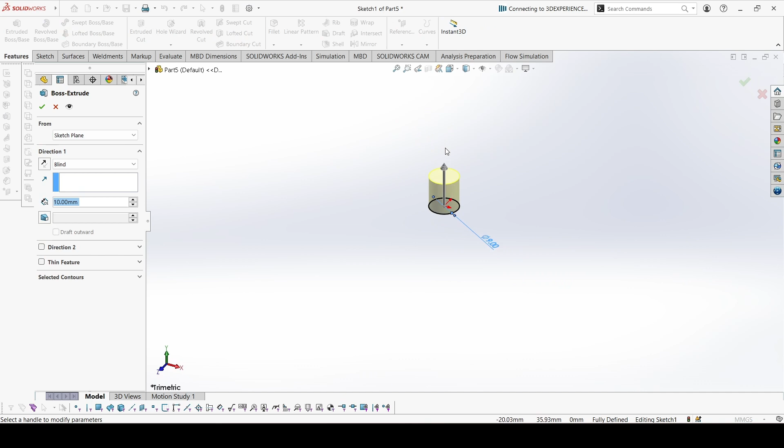Let's start. You can sketch on the top plane. Make a circle. The diameter is 9. Extrude it. Height of extrusion is 120.

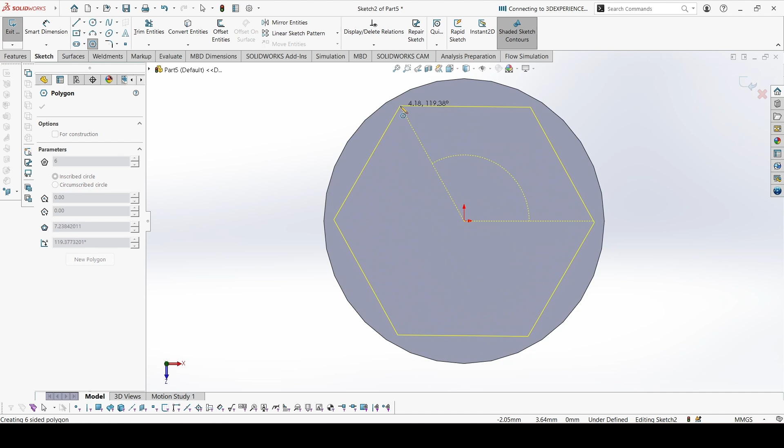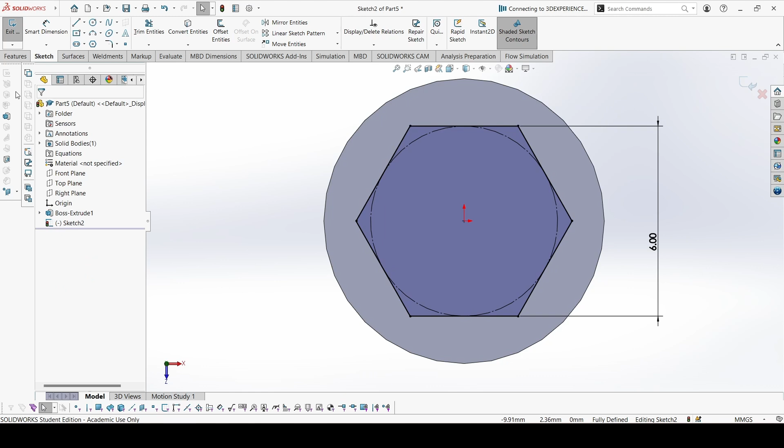Now sketch on this surface. Create a hexagon, using a polygon with 6 sides. The dimension for this distance is 6, and you can make one of these lines horizontal to constrain it. Now we can extrude again. This is 20.

It's done. We can make a chamfer of 1 mm on this edge.

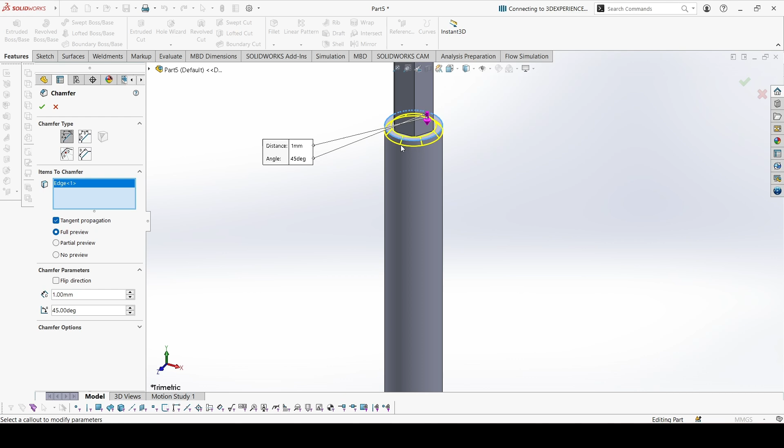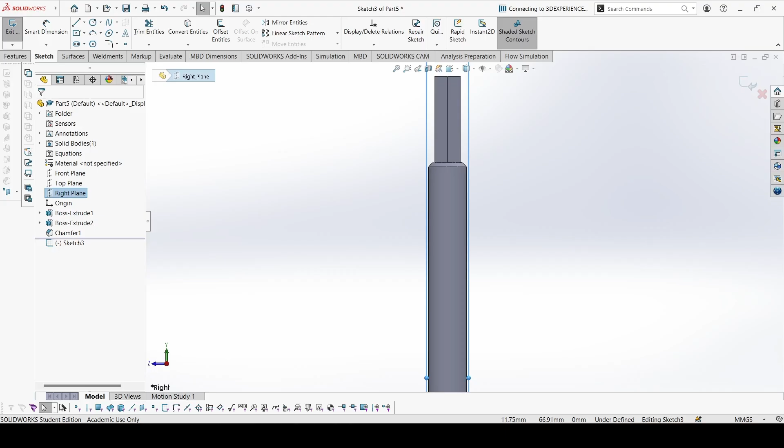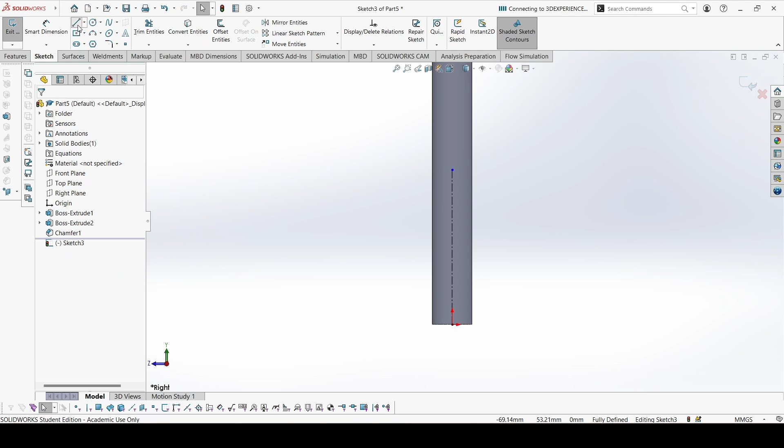Now we need to sketch here to cut this part. First of all, let's create a center line, since the feature is symmetric. Now from here you can make this line. This will be like this.

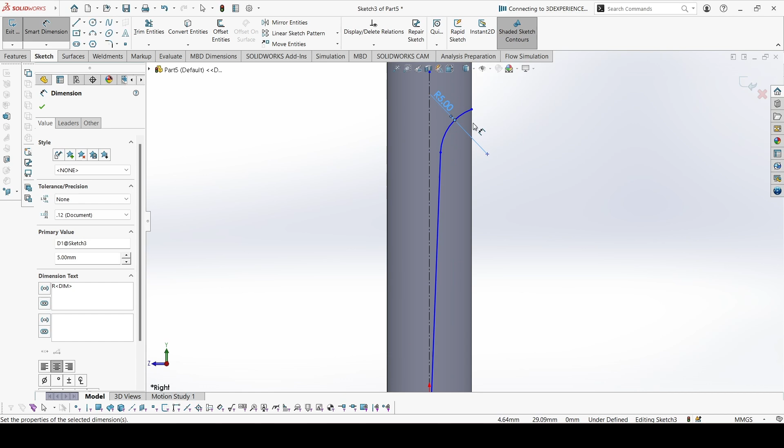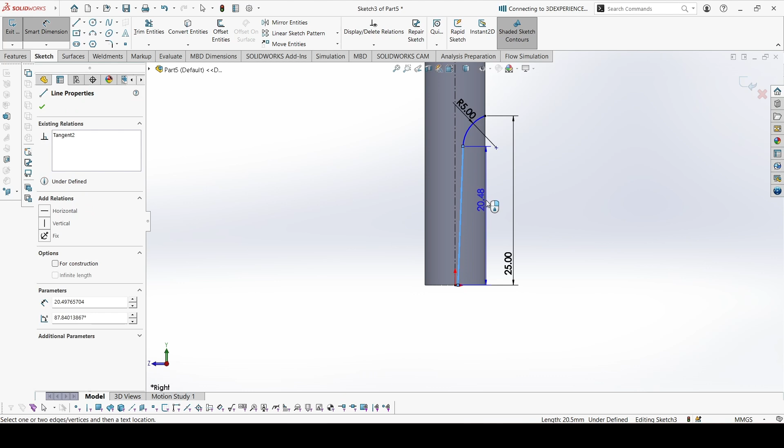This radius is 5. This distance is 25, and the angle can be given from here. This is 4, and lastly this dimension from the center line, this is 1.5.

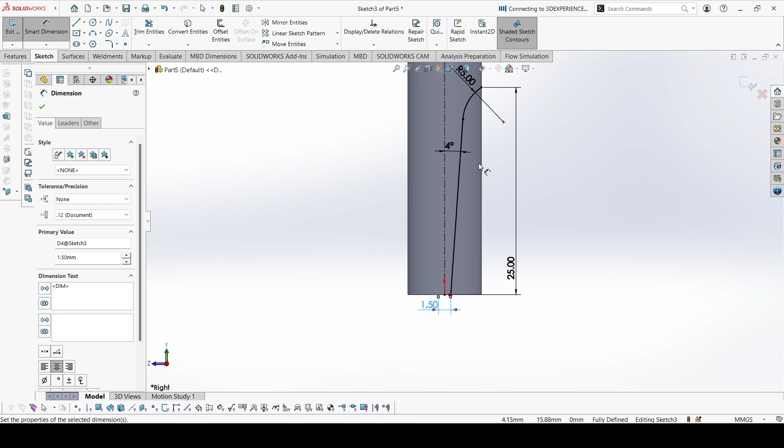So this is constrained. You can select these and mirror. Select the center line too and mirror. Now we can just complete the sketch from both sides.

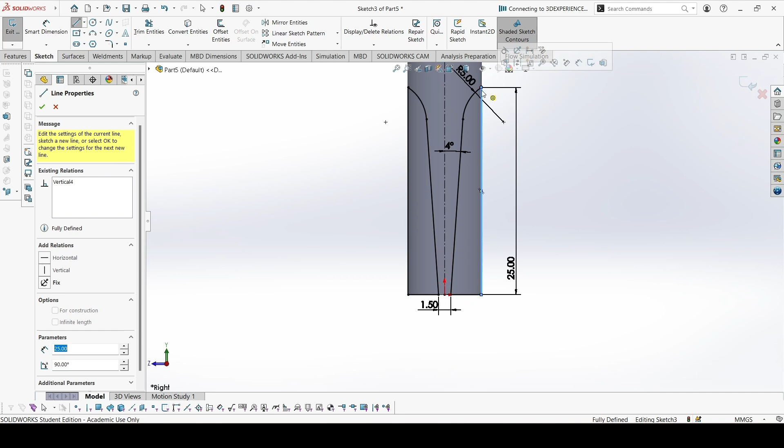Sketch is completed. We can go to extrude cut, and through all both. Select through all both. And done.

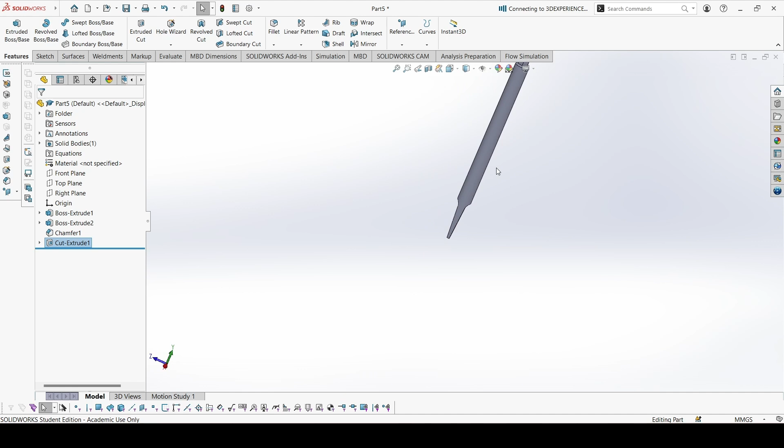So the part is complete. Let's add the material. This is alloy steel, cast alloy steel. Apply, close.

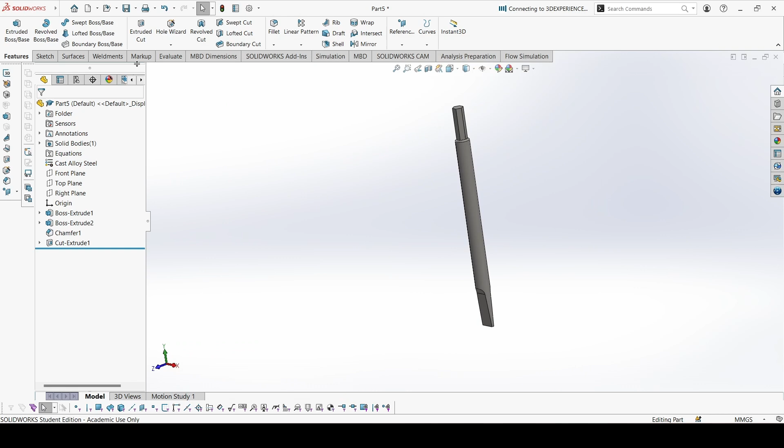Let's check the mass, 53.97 and 53.79. So this must be inversed. So the answer is correct.